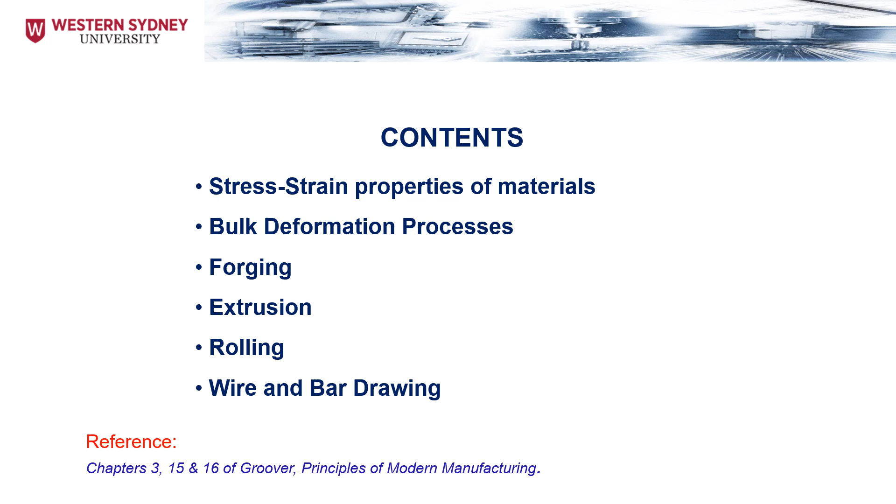First we need to know what are the mechanical properties in design and manufacturing. The mechanical properties will determine the material behavior when subjected to mechanical stresses. These properties include the elastic modulus, the ductility, the hardness, and other various measures of strength.

The mechanical properties important to the designer, such as high strength, would usually make manufacturing more difficult. Let me give you an example: you have a rod made of copper and another one with the same diameter made of steel.

If you try to bend the one made of copper, it's going to be much easier, using less force to bend, while it's going to be much harder if you do it with the same bar made of steel.

First we need to know what are the static stresses we have in general. We have the tensile stress, which tends to stretch the material. Remember the same bar as an example—try to pull it from both sides to make it longer, so it's going to be stretched. This is what we call the tensile stress.

Now the other type we have is compressive, and this one tends to squeeze it. So we're going to push the rod from both ends inward—this will be compressive.

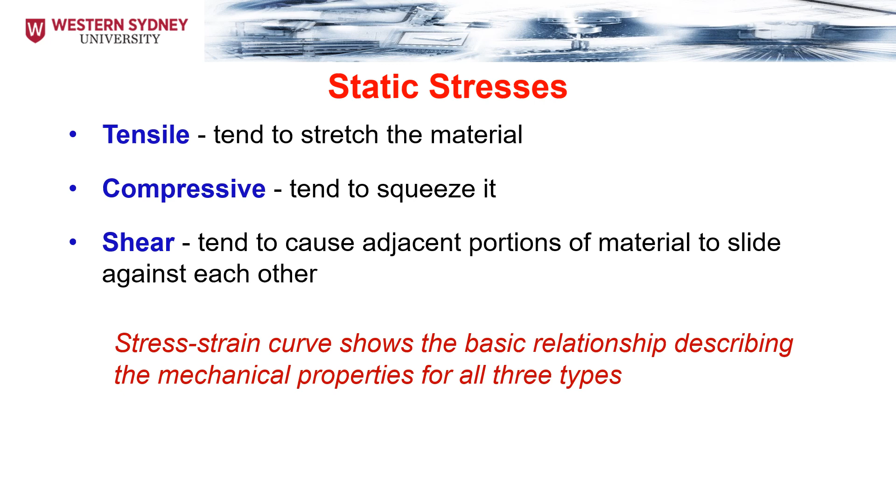The stress-strain curve will show the basic relationship describing the mechanical properties for all the types. So once again, here we have the tensile, we have the compression, and we have the shear.

One of the best ways to check the properties of materials is what we know as the tensile test. The tensile test is the most common test for studying the stress-strain relationship, especially in metals.

I say especially in metals because actually it can be done also with different materials. We can do it even for plastic, for example, and even ceramic to a certain level, but usually it can be done with any material that can be used for testing.

As we apply the force, the moving crosshead is going to move down, and this will cause the elongation of the specimen, so it's going to reach a new length.

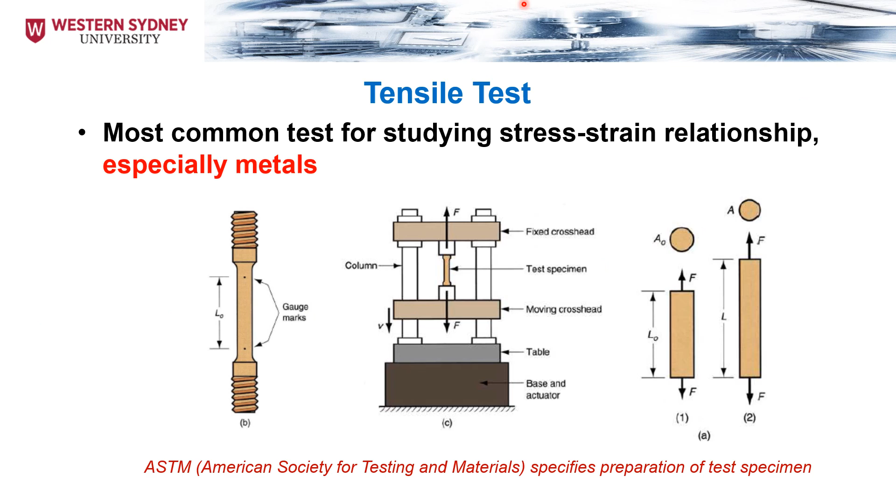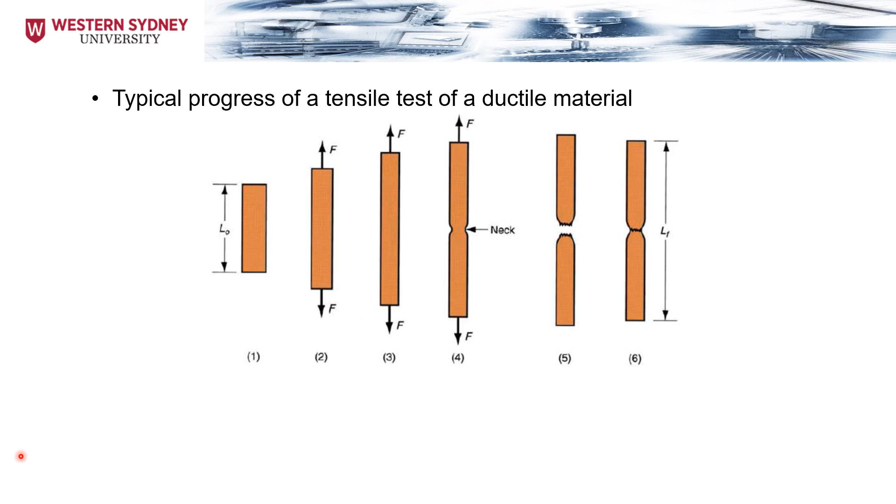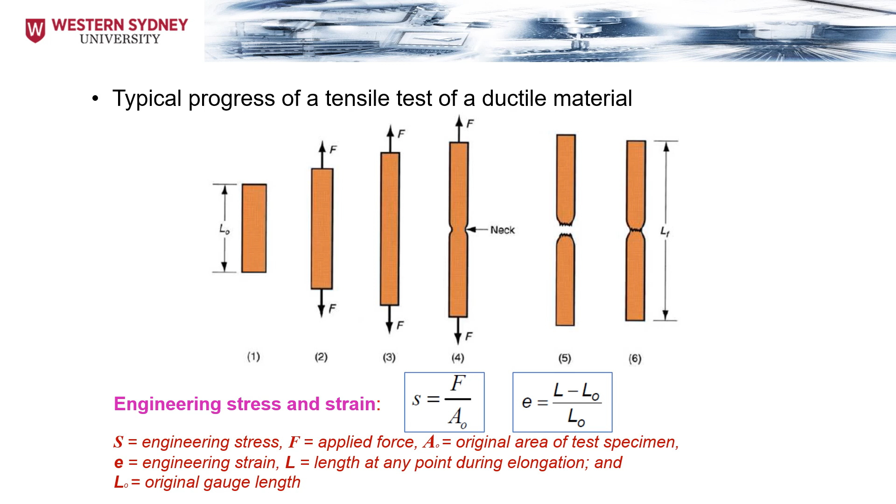So what's happening in the elastic region? This region occurs prior to the yielding of the material. Before yielding, we follow what we know as Hooke's law. During Hooke's law, the material shows elasticity, meaning any deformation is simply relieved as we remove the force. After we reach the yield strength, we enter the plastic region, and after yielding, any deformation becomes permanent.

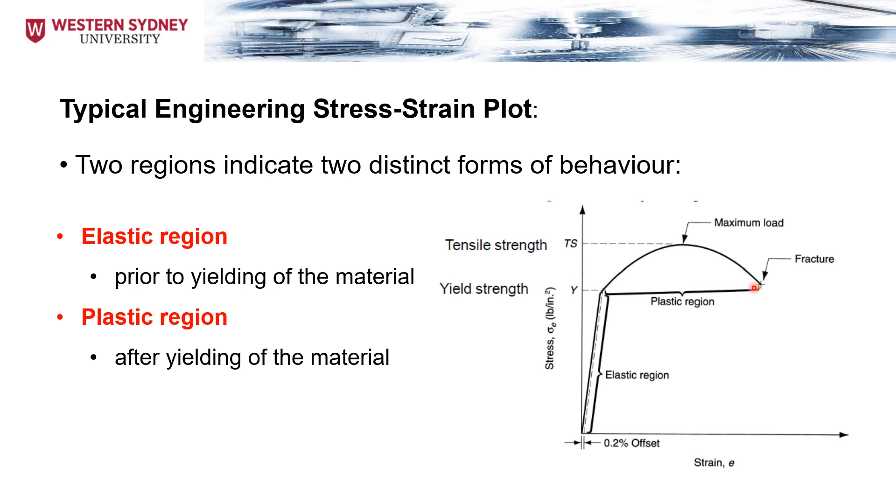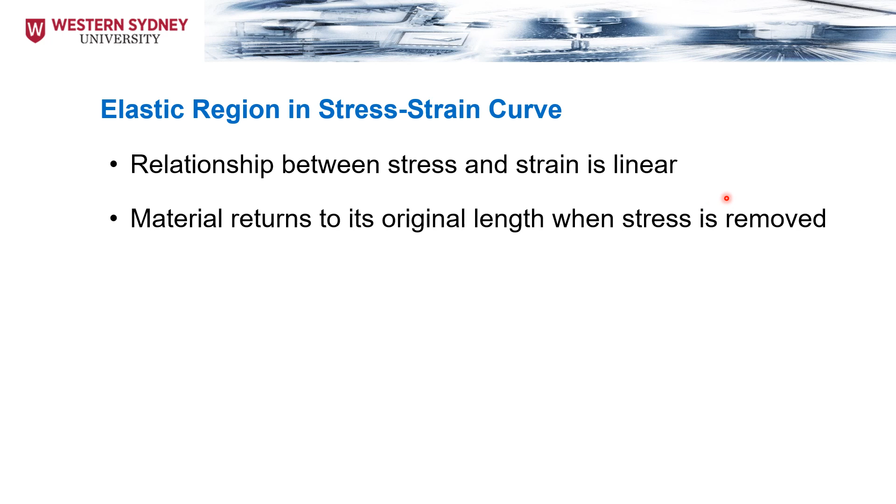Again, in the elastic region of the stress-strain curve, the relationship between stress and strain is linear, and the material returns to its original length when the stress is removed. This process follows Hooke's law: stress is equal to the modulus of elasticity, or Young's modulus, multiplied by the strain of the material.

E is a measure of the inherent stiffness of the material. Harder, stiffer materials have a higher value of E. Its value differs for different materials. For example, steel is higher than copper, and copper is higher than aluminum, and so on.

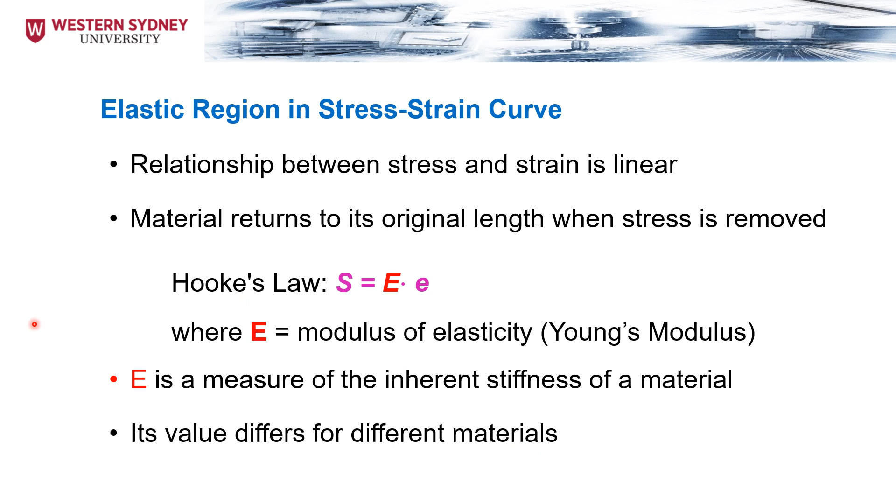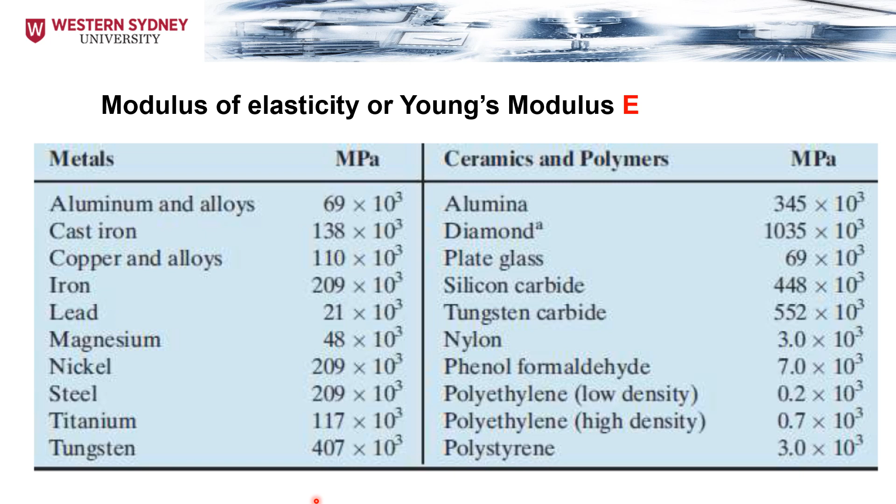The yield point in the stress strain curve is the turning point between the elastic region and the plastic region. As stress increases, a point in the linear relationship is finally reached when the material begins to yield.

The yield point Y, the stress at this value and that strain, can be identified by the change of slope at the upper end of the linear region. Y is a strength property, and other names for the yield point are yield strength, yield stress, and also the elastic limit.

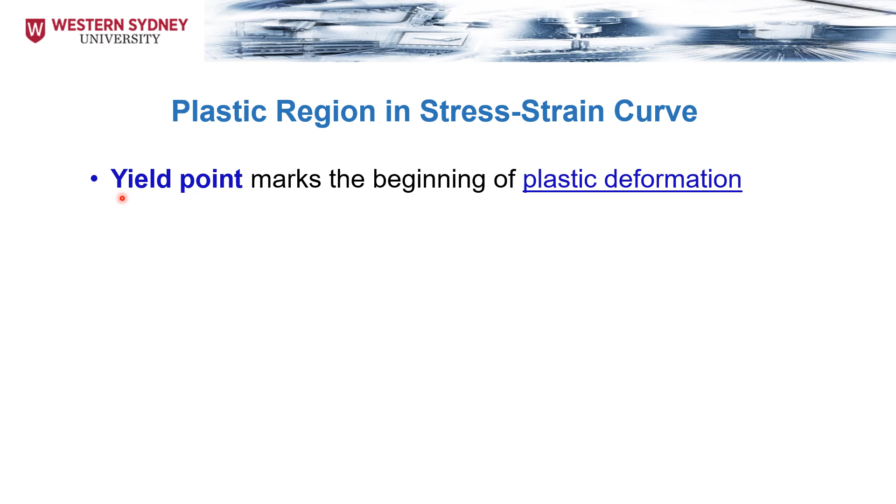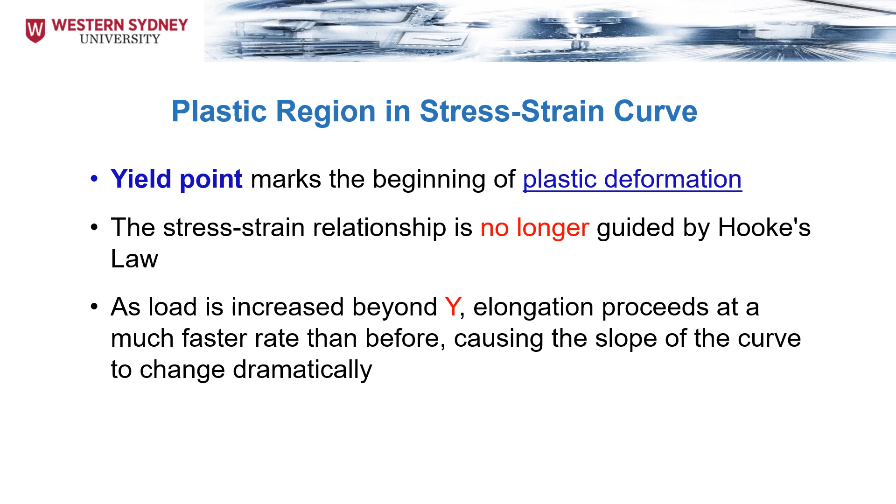After the yield point, the material starts to behave as a plastic material, so we enter the plastic region of the stress strain curve. The yield point marks the beginning of plastic deformation, and the stress strain relationship is no longer guided by Hooke's law. As the load increases beyond the Y value, the elongation proceeds at a much faster rate than before, causing the slope of the curve to change dramatically.

The tensile strength in the stress strain curve, known as the maximum load point, is where elongation is usually accompanied by a uniform reduction in the cross-sectional area, as mentioned earlier. This is consistent with maintaining a constant volume.

Remember that whenever the length changes, the volume remains the same, and this only happens if the cross-sectional area of the specimen drops.

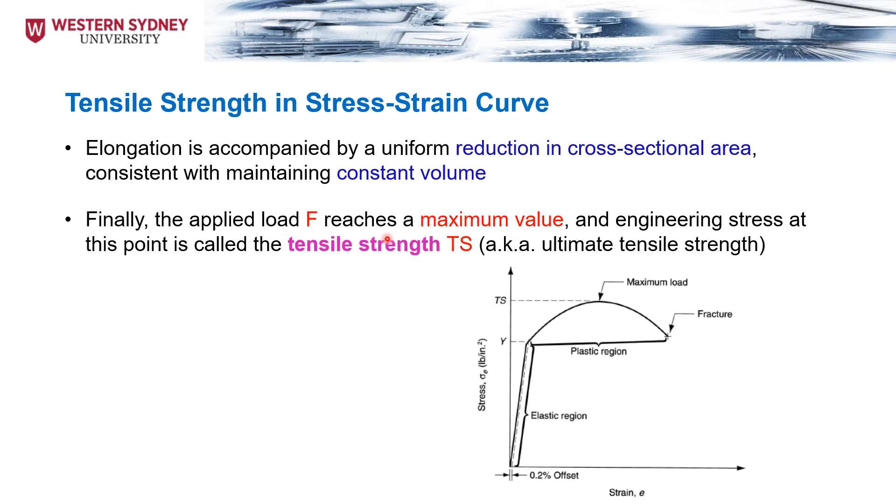So as we apply the load F, we reach the maximum value here, and the engineering stress at this point is called the tensile strength, or TS, also known as the ultimate tensile strength of the material. This can be given as the value of the maximum load, not the initial load, divided by the original cross-sectional area of the specimen.

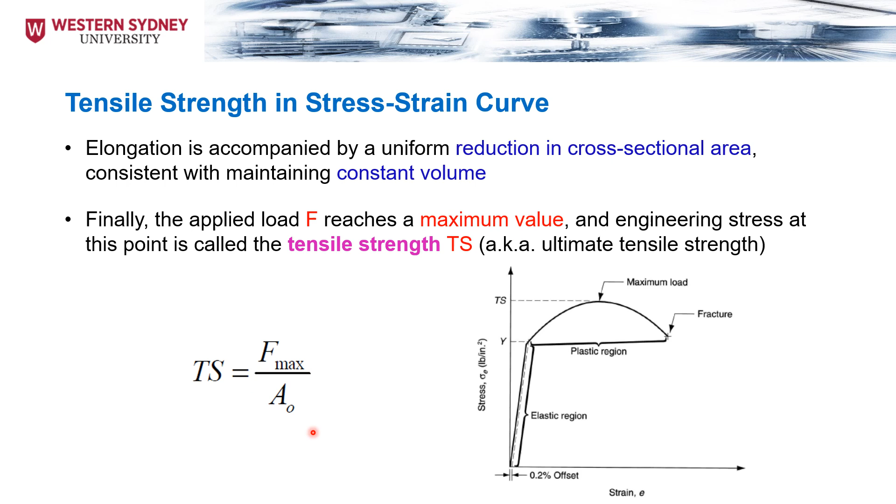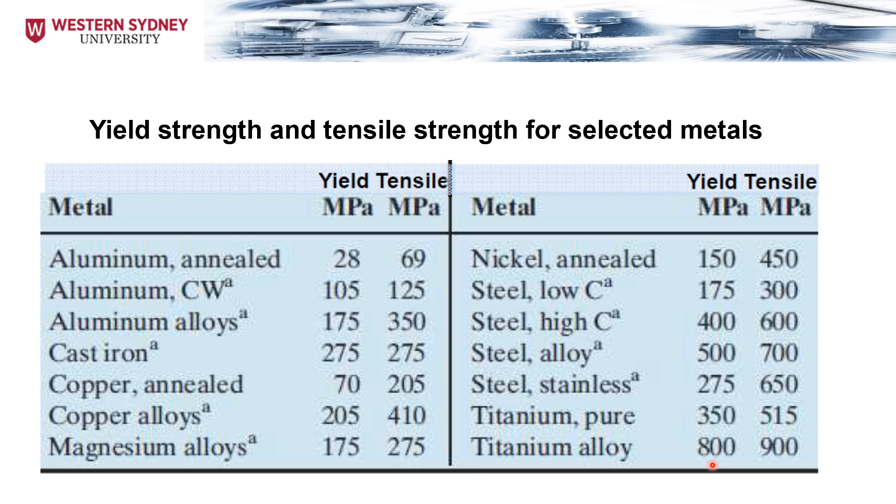The ductility of materials and how this changes will affect the tensile test operation. Ductility is the ability of materials to plastically strain without fracture.

Let's take an example with wood. If I have a piece of wood, a piece of aluminium, and a piece of steel, and I try to deform or bend the wooden one, it will break before it has any plastic deformation, unless you add some heat. That means wood is a non-ductile material.

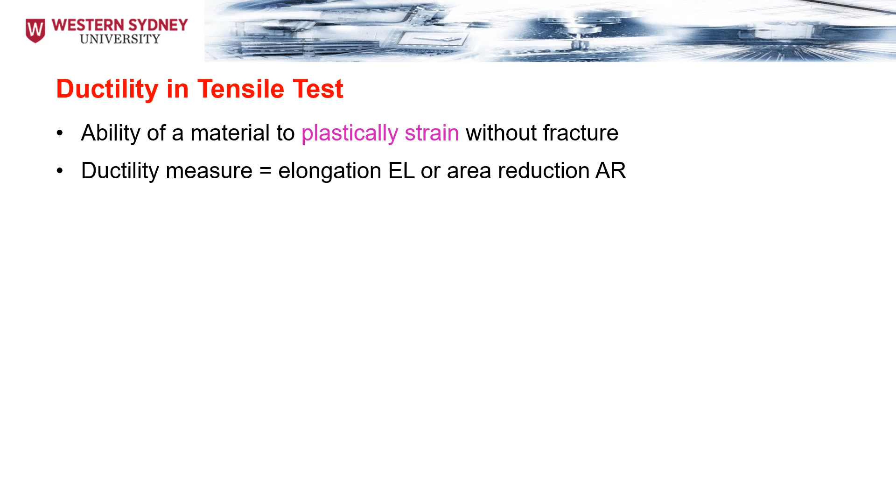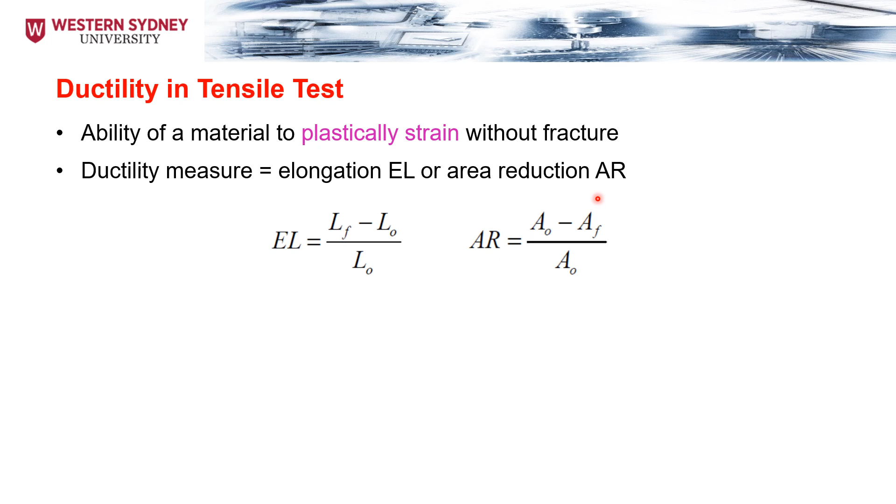Elongation is simply delta L divided by the original length, so the final length minus the original length divided by the original length. Or it's the original cross-sectional area minus the final cross-sectional area, divided by the original cross-sectional area.

EL is the elongation, LF is the specimen length at fracture, LO is the original specimen length, and LF is measured as the distance between the gauge marks after the two pieces of the specimen are put back together after the fracture.

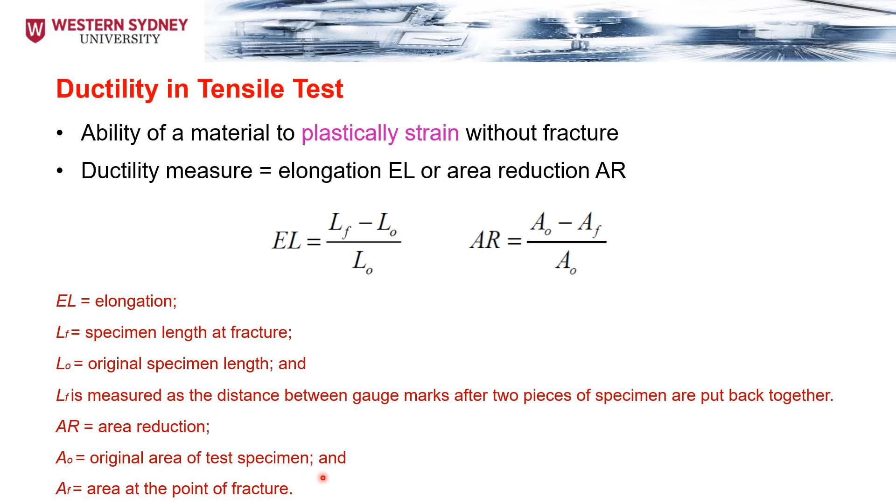AR is the area reduction, AO is the original area of the test specimen, and AF is the area at the point of fracture.

So the ductility as a percentage of elongation for the selected material is given in this table. You can see, for example, for aluminum, we're going to have 40%.

Now let's look at a non-ductile or less ductile material, the ceramic. It's 0%. For the polymers, the thermoplastic polymers have an elongation value of 100%. The thermosetting polymers, which are harder, have only 1%. And for the elastomers, it's also 1%.

So among these values, the elastomers and thermosetting polymers have less ductility. That means when you change their shape, they return back to the original shape because they don't have any plasticity. They don't undergo deformation when force is added.

For the other materials, you get a reasonable value. Steel 30%, steel alloy 20%, austenitic stainless steel 55%. For aluminum alloys with heat treatment, it's 8%. For annealed aluminum, it's 40%. For annealed copper, it's 45%.

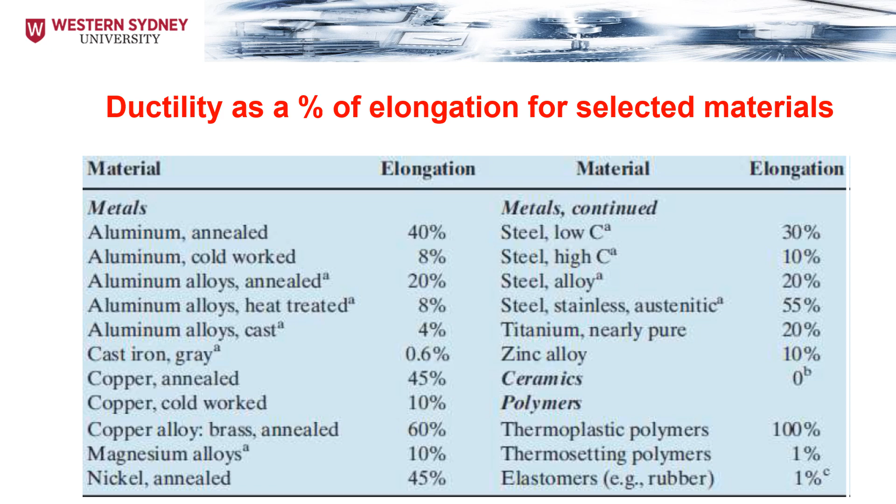Now, cast iron is not a ductile material. We cannot make a deformation for it because it's going to break. Actually, in cold work - and that's what we're going to explain later.

Now, we know the actual stress strain, but we also have true stress and true strain. The true stress is the value obtained by dividing the applied load by the instantaneous area instead of the original area. So true stress equals the instantaneous force divided by the actual or instantaneous area resisting the load.

True strain is a more realistic assessment of the instantaneous elongation per unit length. So true strain is the natural logarithm of the instantaneous length divided by the original length.

So if I redraw the stress strain curve versus the true stress strain curve, you'll see the difference between them: fracture happens after the fast degradation in the cross-sectional area, and this causes the stress to drop dramatically after the value of the TS.

In the case of the true strain diagram, you can see that things drop less dramatically, and the value doesn't have to be exactly like the yield point stress, as we can see in this diagram.

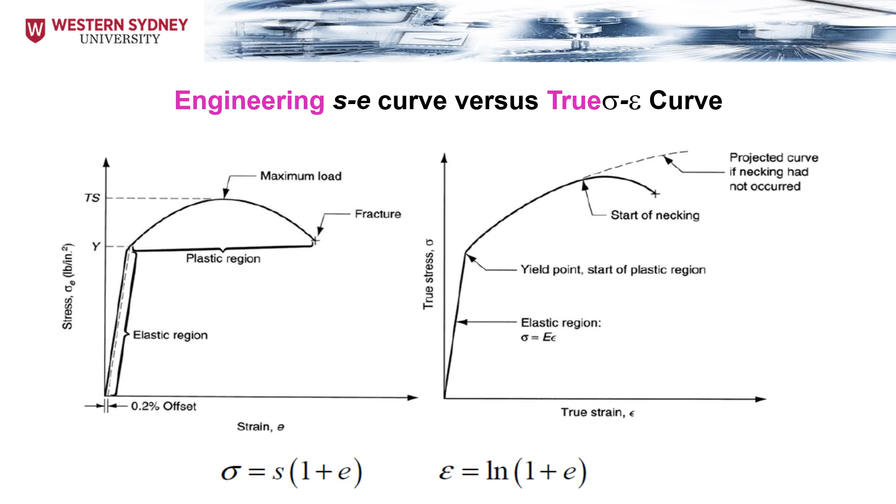So the strain hardening, or work hardening, in the stress strain curve - what we're going to have here, wait a second.

So we know that the true stress increases continuously in the plastic region until we reach necking. In the engineering stress strain curve, the significance of this was lost because the stress was based on an incorrect area value. It means that the metal is becoming stronger as strain increases.

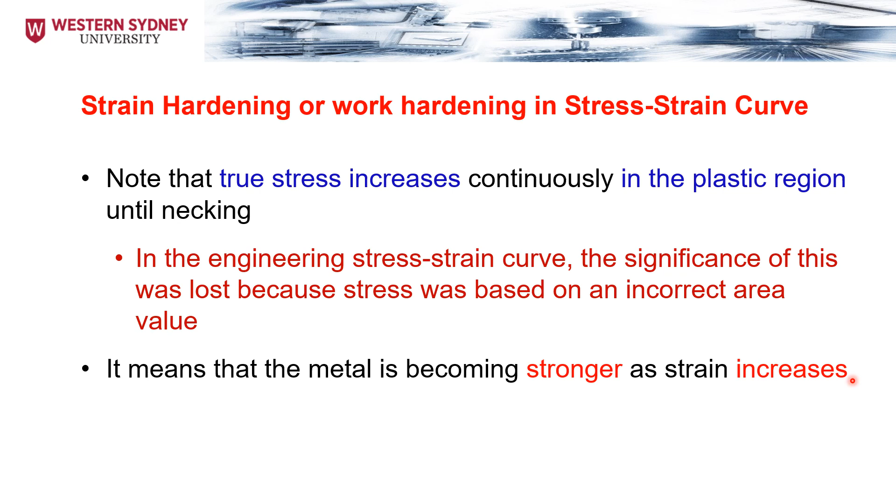So this gives a simple hint about strain hardening: the material becomes stronger as the strain increases. So if I roll or compress a material again, it becomes stronger because its length has changed. Because we added forces, we changed the metal's strain, and thus the material becomes stronger.

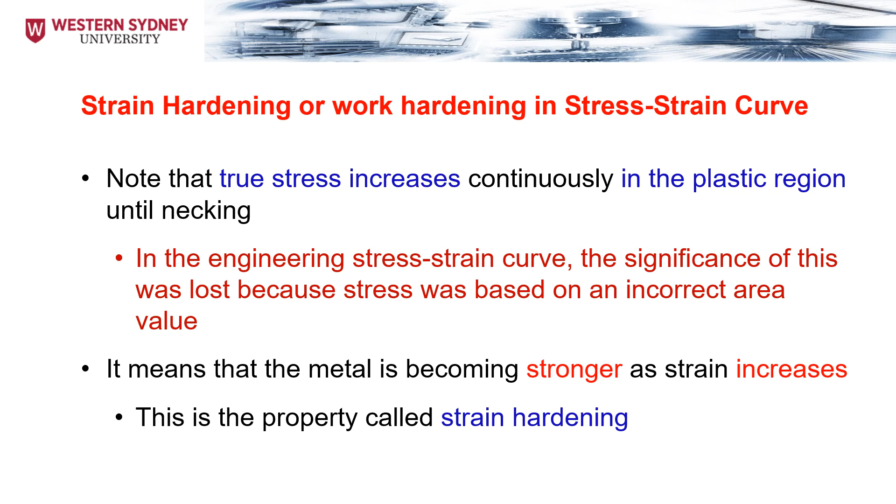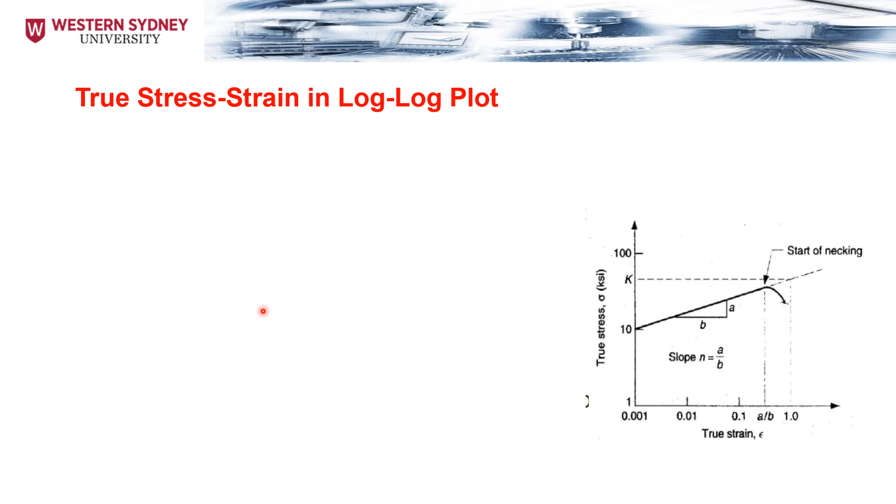So let's see how we use that. Because it's a straight line in the log-log plot, the relationship between true stress and true strain in the plastic region is called the flow curve. And S is going to be the YF, which is called the flow stress.

So the value of the stress we have here is the flow stress, which can be found from the following equation: flow stress equals K, the strength coefficient in megapascals, multiplied by the strain at any point raised to the power n, which is the strain hardening exponent - the slope of that straight line.

So the categories of the stress-strain relationship: first, we're going to consider that the material is perfectly elastic. Second, elastic and perfectly plastic, or elastic and strain hardening. Perfectly plastic means it's going to be straight force, this line going to be horizontal. Whenever we add the force, the material is simply deformed.

We have the elastic and then perfectly plastic. That's when the force is increased, the stress is increased until we reach the yield point, and then after that we have a horizontal line for the plasticity of the material. We also have the elastic and strain hardening, and that's what we have in most of the cases in forging processes.

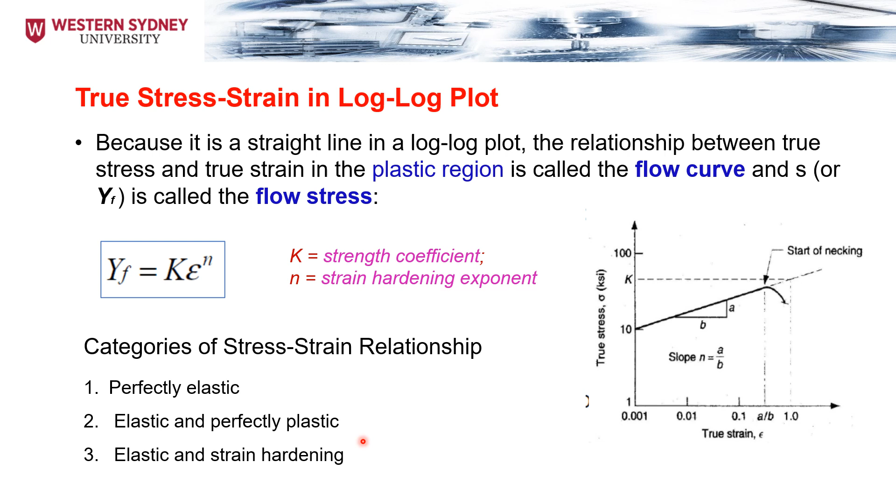So for perfectly elastic, whenever we have the stress, the strain will be changed linearly. In that case, we're not going to have any plastic deformation, and that's what we have in the case of brittle materials. So once again, we go back to the example of the wooden piece. When we try to bend it, it's going to increase the stress, but when you relieve the stress, the shape of the material will come back to the same position.

We have the second case, elastic and perfectly plastic. In that case, the K value is equal to the yield strength, and the slope of the line in the plastic region is 0. That means the value for the flow stress is equal to the K value directly. That's what happens with metal when it's heated to a high temperature—it gets softer, and thus the same force, the same pressure or strength, is applied to make the deformation.

We also have the elastic and strain hardening case, where the K value is more than the yield strength value, and the N value is not equal to 0. So we have an actual slope for this curve, and that's what happens in most ductile materials when they're cold worked. Every time we compress or stretch the material, the K value is higher than the yield strength—we need more stress to make the change in the shape of the metal.

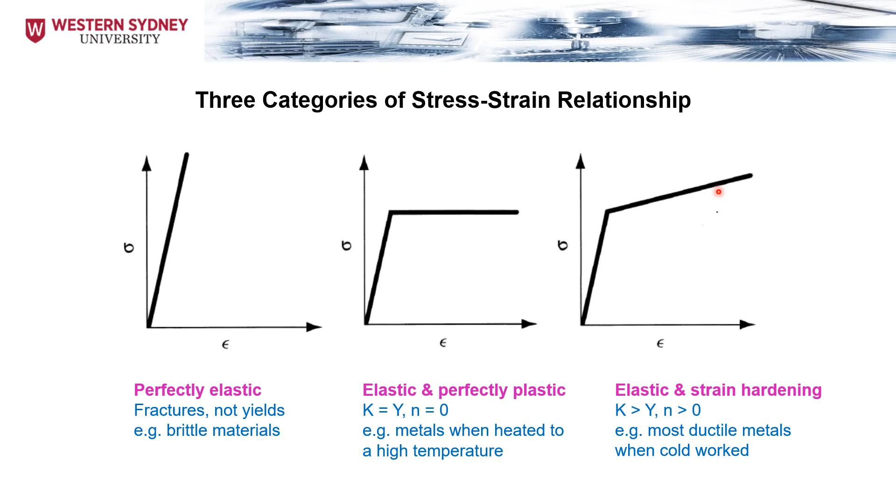We put the specimen in between and squeeze it. In that case, the length is going to be dropped, or what we call the height—the height is going to be dropped. So once again, the volume is constant. That means every time we drop the length, the diameter or cross-sectional area is going to be increased, because the volume once again is constant.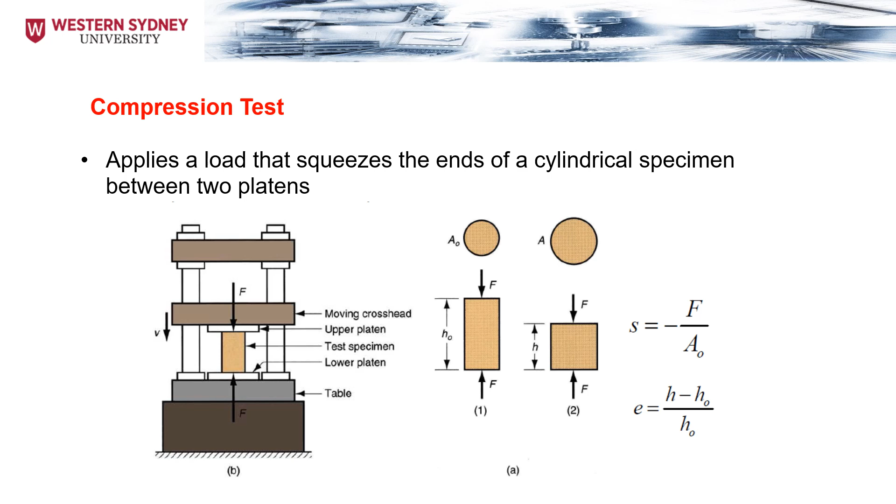In that case, the stress value is going to be equal to F over A, but negative because we are compressing, not stretching. The strain is going to be equal to H minus H0 divided by H0. As long as H is less than H0, we'll get this value as negative, but we always take it as an absolute or positive value for the convenience of calculations. Now for the stress-strain curve in the compression case, instead of reaching a TS value...

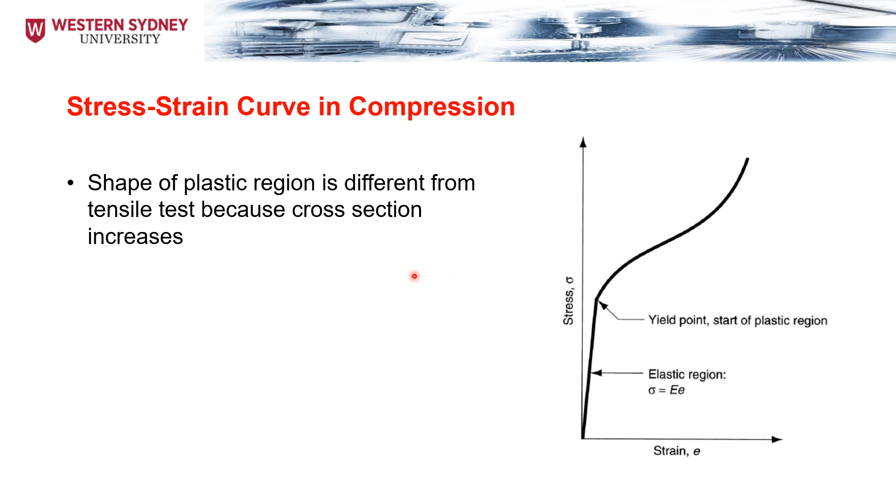We're going to have the sudden, dramatic drop in the cross-sectional area, and then we get the fracture. The stress is going to keep increasing because logically the material is not going to be broken. It's always going to be compressed, but it's not going to be bent between the two parts of the machine. So the shape of the plastic region is going to be different from the tensile test because of the cross-section. It simply keeps increasing to infinity, so the calculated value of the engineering stress is always going to be high.

Now, the tensile test versus the compression test - what will be the difference between them? Although differences will exist between the engineering stress-strain curves in tension and compression tests, the true stress-strain relationships are going to be nearly identical. Since tensile test results are more common, the flow curve values for K and n from the tensile test data can be applied to a compression test.

When using the tensile K and n value data for compression, we need to ignore necking, which is a phenomenon peculiar to straining induced by tensile stresses.

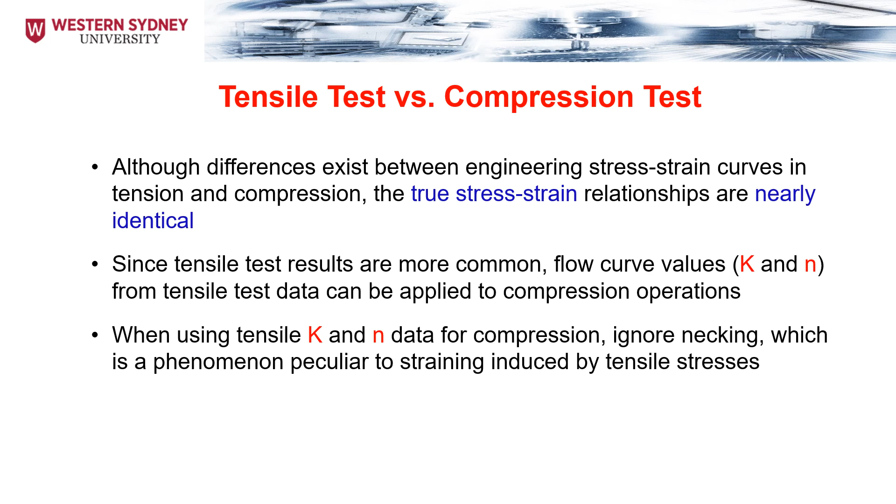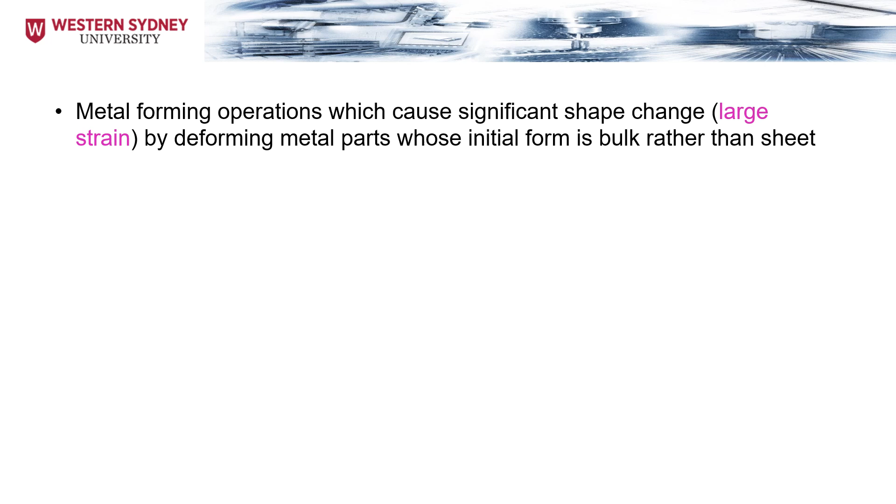Now, all these properties are going to be applied in what we know as the bulk deformation processes. Here we are going to cover the most common deformation processes. Metal forming operations, which cause significant shape changes, cause large strain by deforming metal parts whose initial form is bulk rather than sheet. So bulk deformation deals with bulk materials rather than sheet. If we work with sheet, we call it sheet metal working. These processes stress the metal sufficiently to cause plastic flow into the desired shape.

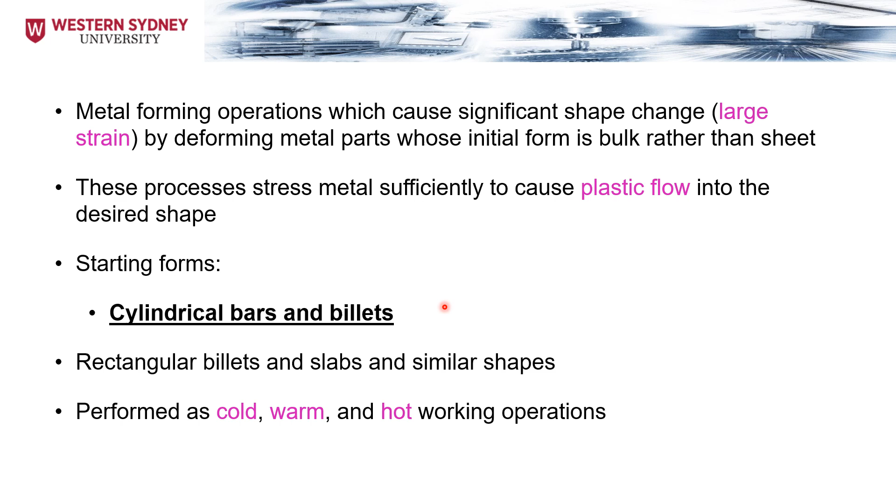The starting forms are usually cylindrical bars and billets, rectangular billets and slabs, and similar shapes. It can be performed as cold, warm, and hot working operations.

Now, when we say that an operation is cold formed or hot formed, it depends on the temperature we use. Cold forming is when the deformation process happens when the temperature of the specimen, bar, or bulk material is less than 0.3 of the melting point. So if it's done at room temperature of 25 degrees, or even at 100 degrees, it's considered cold forming.

In that case, we're going to have better accuracy control because there will be no expansion or contraction in the volume. We're going to have better surface finishing because there will be no oxidization of the metal due to high temperature. It's going to cause strain hardening - we said that strain hardening is how to get stronger materials because you change the strain of the material. Large forces are going to be required, and this will be a negative point. Clean surfaces, which is good, because once again we're not going to have any changes in the metallurgical properties of the materials.

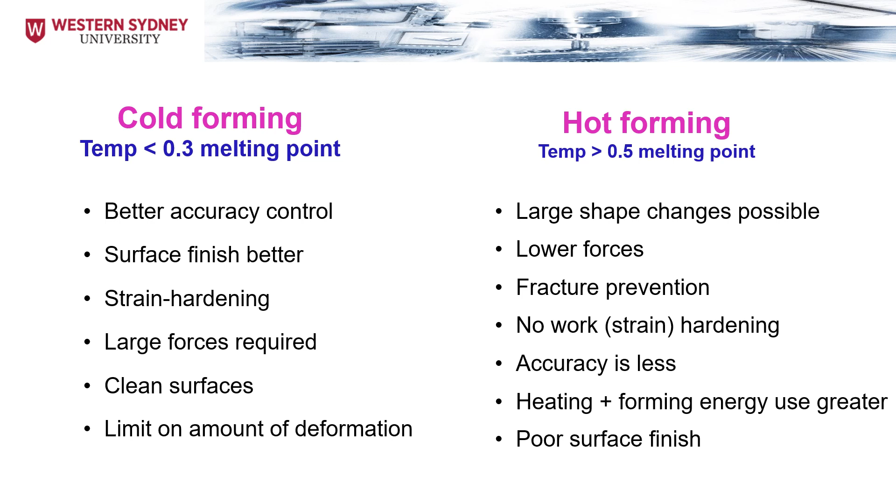This gives you a hint why the blacksmith always heats up the metal before doing work on it, because he's simply increasing the ductility of the material. The metal at lower temperature will require higher strength to cause the deformation. When it gets heated up, it's going to get smoother.

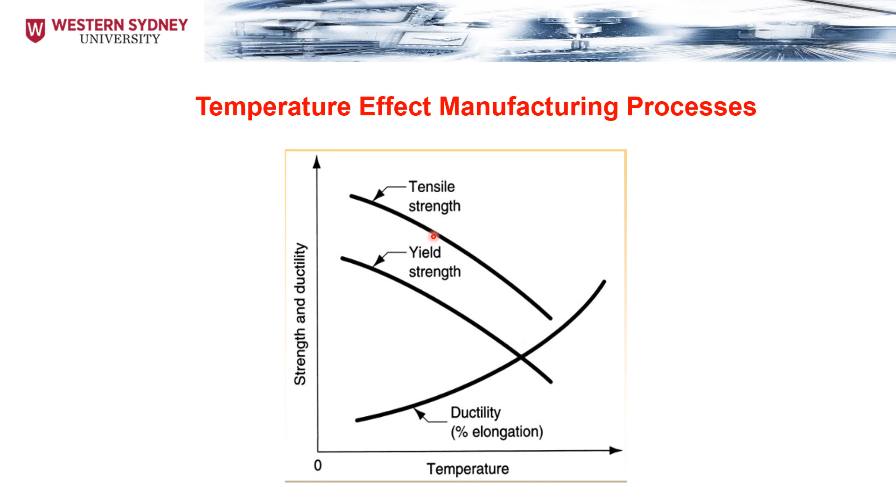The four basic bulk deformation processes are: forging, where the work is squeezed and shaped between opposing dies; extrusion, where the work is squeezed through a die opening and thereby takes the shape of that opening; rolling, where the slab or plate is squeezed between opposing rolls; and finally wire and bar drawing, where the diameter of the wire or bar is reduced by pulling it through a die opening.

For extrusion, if I put some paste inside this syringe and squeeze it by moving the piston inside, the material is forced to leave through the syringe outlet, which has a cylindrical shape, and thus I make a cylindrical shape. That's what they actually use for decorating cakes - you put the cream in the applicator and squeeze it, forcing it through the die, and it takes the shape of the die. But in our case, this is done with metal.

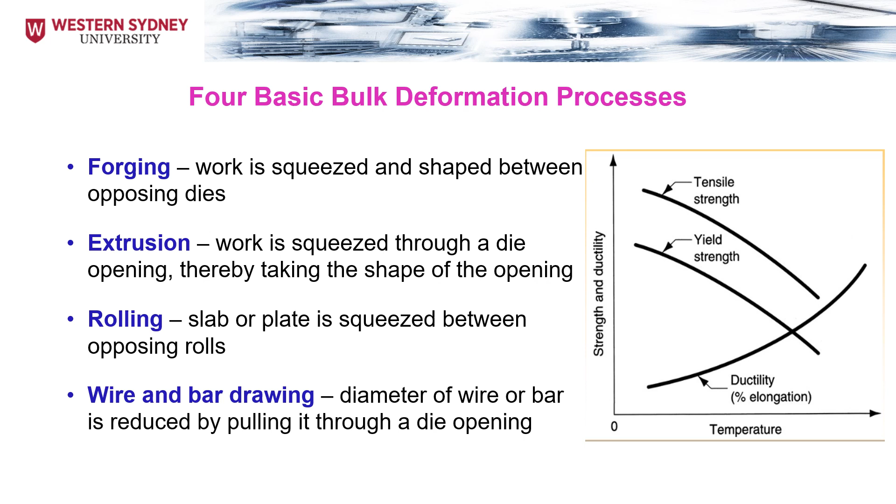So we're going to start with the first and oldest method among all, which is the forging operation.

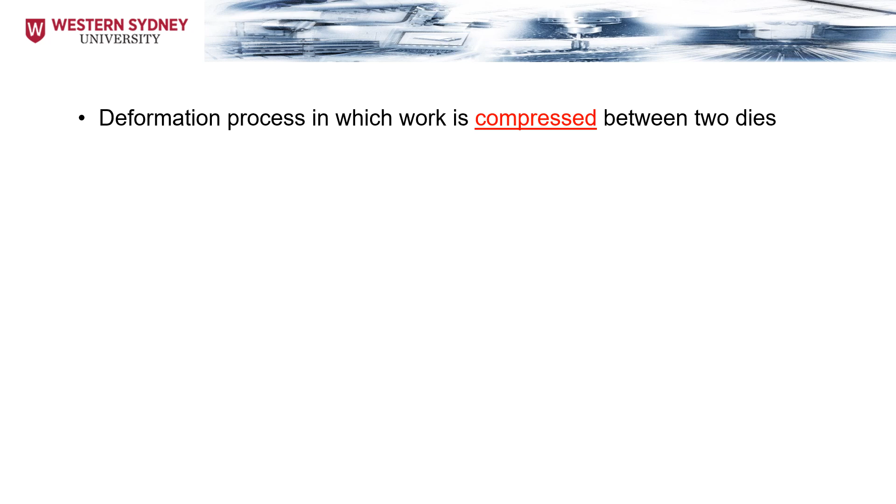In the forging operation, it's a deformation process in which the work is compressed between two dies. It's one of the oldest metal forming operations, dating back to about 5000 BC.

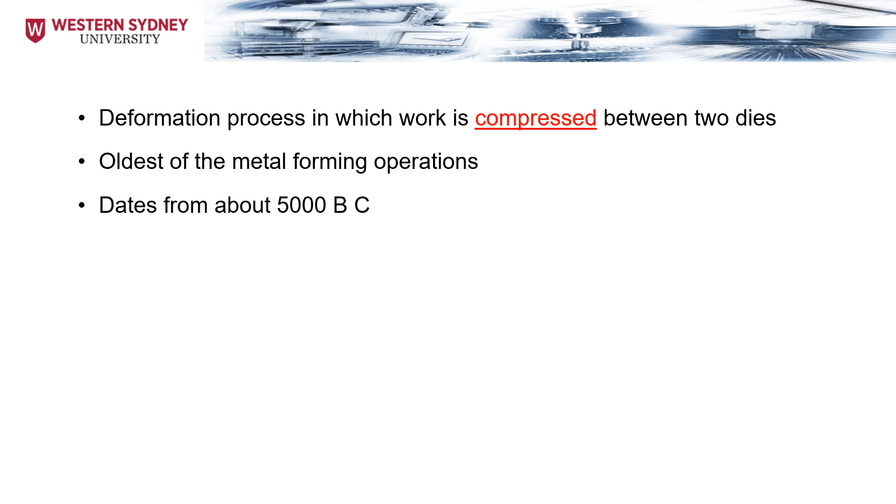Among the different products are engine crankshafts, connecting rods, gears, aircraft structural components, jet engine and turbine parts. Also, basic metals industries use forging to establish the basic shapes of large parts that are subsequently machined to final geometry and sizes.

By following this link, you can see some examples of the forging processes.

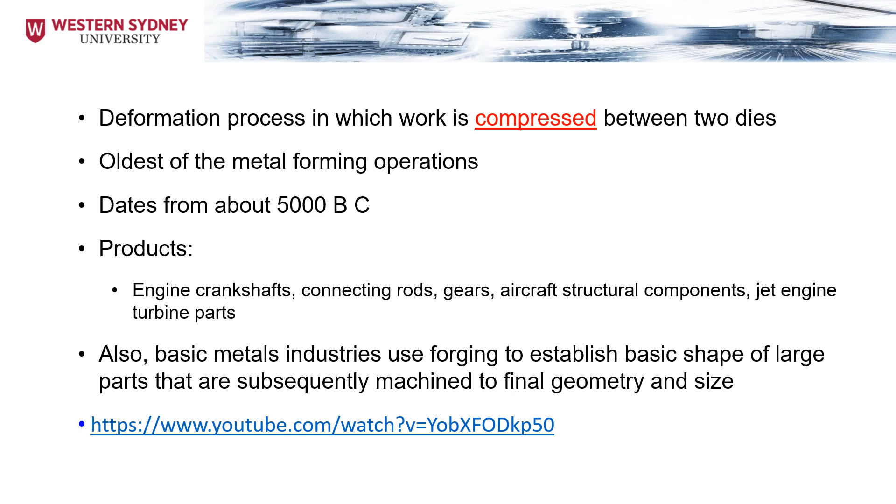The classifications of the engineering forging operations.

So we have the cold versus the hot forging. With hot or warm forging, the advantage is the reduction in strength and increase in ductility of the work metal, as we mentioned earlier. As you increase the temperature, the strength drops while ductility increases. In cold forging, the advantage is increased strength due to strain hardening, which doesn't happen in hot or warm forging.

Now, of course, hot forging is when the temperature of the metal is above 50% of the melting temperature, and cold forging is when the temperature is less than 30% of the melting temperature.

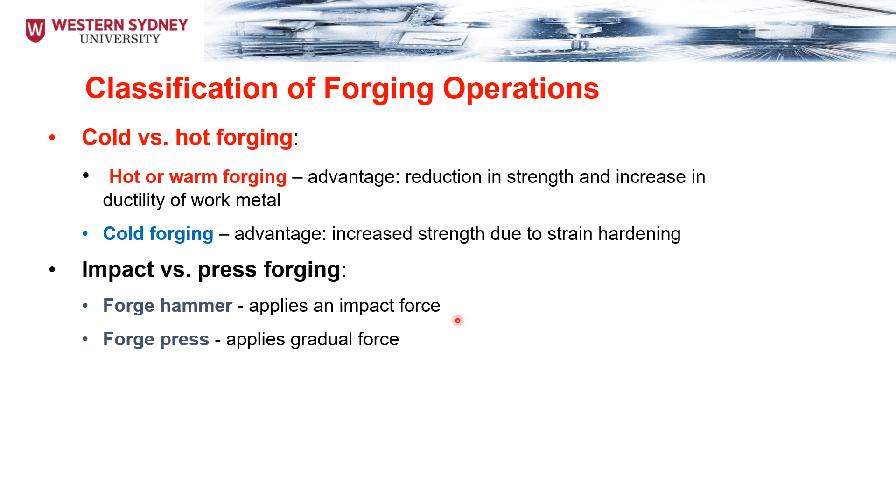Now, the other classification of forging operations is impact versus press forging. In impact forging, the forge hammer applies an impact force, so we keep hitting - the die leaves the part and comes to hit it with the impact force. The other term is forge press, where it applies a gradual force on the part to make the deformation.

The different types of forging operations are open die, where you can see we have two dies open, and the part is included with them. We have impression die forging, where we have two dies, but this die has cavities. This one also has something called the flash, which I'll talk about soon.

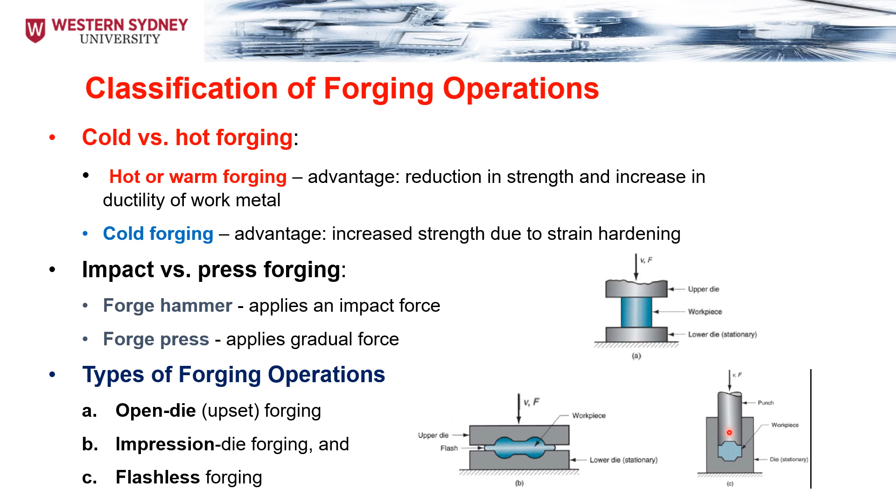We also have flashless forging, where once again the specimen is contained within the mold, and thus we compress it and force it to take the shape of the cavity of that mold.

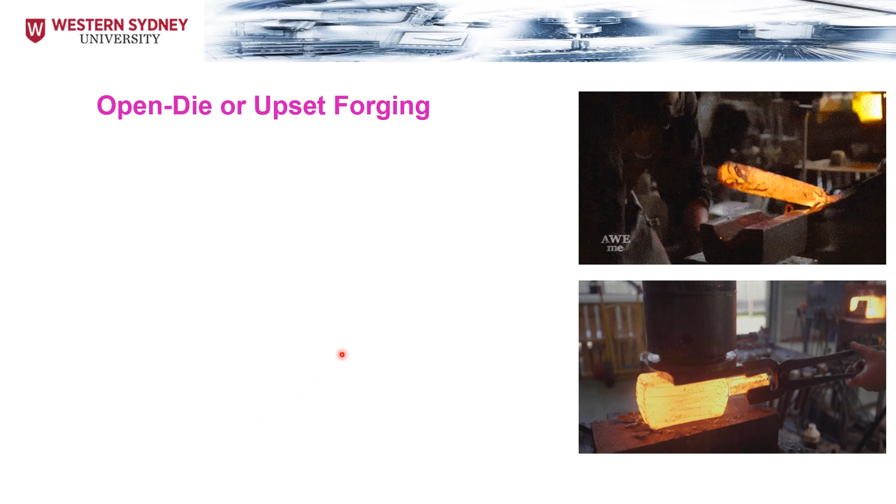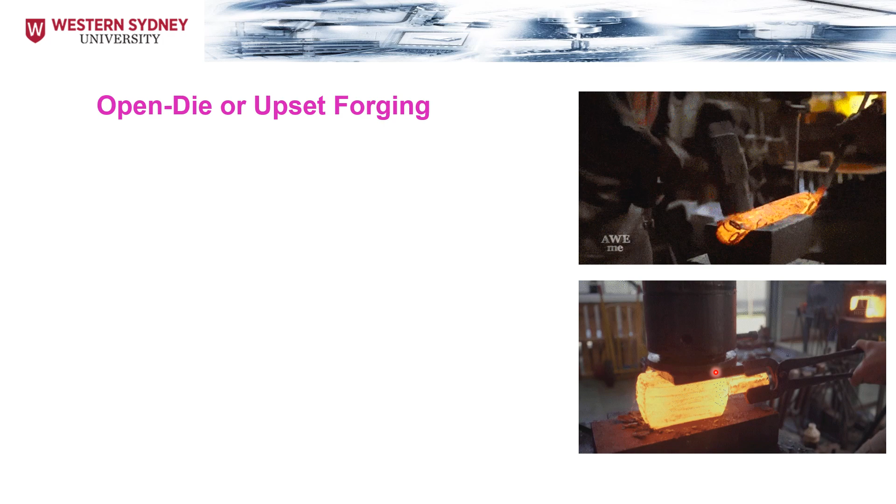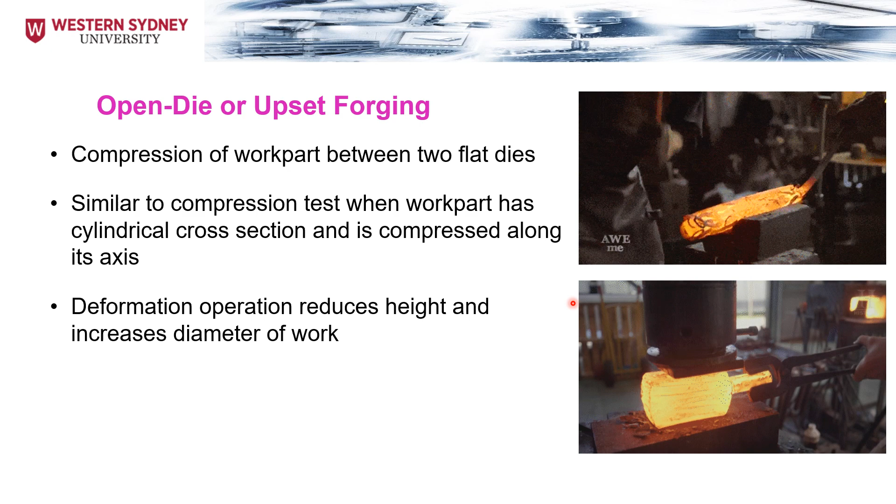So in this example, you can see that in open die or upset forging, we have the specimen placed between the two dies, and we start to have impact on it. Once again, this one is adding the impact - we have another type which can have gradual forces on it. So it's a compression of the work part between two flat dies, similar to the compression test, when the work part has a cylindrical cross section and is compressed along its axis. Deformation will reduce the height and increase the diameter of the work. Common names include upsetting or upset forging operation.

So if I analyze open die forging in the case of no friction - if no friction occurs between the work and the die surface, then homogeneous deformation occurs, so that radial flow is uniform through the work part height, and the true strain is given by the equation: true strain equals the natural logarithm of the original height of the part divided by the instantaneous height of the part. With this equation, we can get the initial strain, the mid strain, and the final strain. The flow stress value can be calculated by multiplying the K value.

As you remember, we have a specific K value for different materials, multiplied by the true strain raised to the power n.

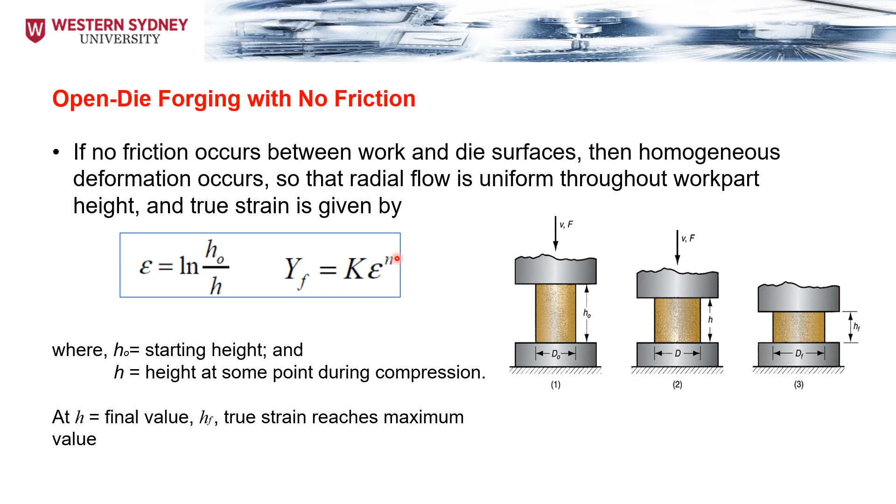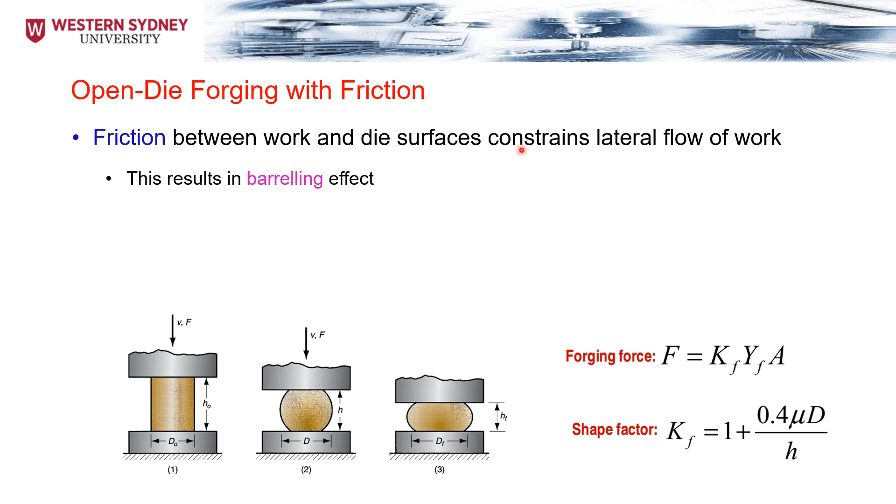Now, in real life, we're going to have friction between the specimen and the die at this point. This will cause the metal to not perfectly slide with the die, even if we add some lubricant. So this causes something called barreling. The barreling happens because the material sticks to the die. So in open die forging, friction between the work and die surfaces constrains lateral flow of the work, resulting in the barreling effect.

In hot open die forging, the effect is even worse due to heat transfer at the die surfaces, which causes the metal to cool and increase its resistance to deformation.

The forging force is calculated by the following equation: Kf multiplied by the flow stress multiplied by the area. The flow stress has been calculated from the previous equation, which is equal to K multiplied by the strain to the power n, and the area is the instantaneous area.

The Kf, or shape factor, is calculated with the following equation: Kf equals 1 plus 0.4 multiplied by the coefficient of friction mu, multiplied by the instantaneous diameter, divided by the instantaneous height. That means the Kf value is going to be different from case number 1 to case number 2 to case number 3, so we need to calculate a different value for the Kf each time.

Thus, the force in case number 1 is going to be less than case number 2, and less than case number 3, because each time we're going to have strain hardening for the part, and this will resist the material deformation, causing the force required to cause deformation to increase.

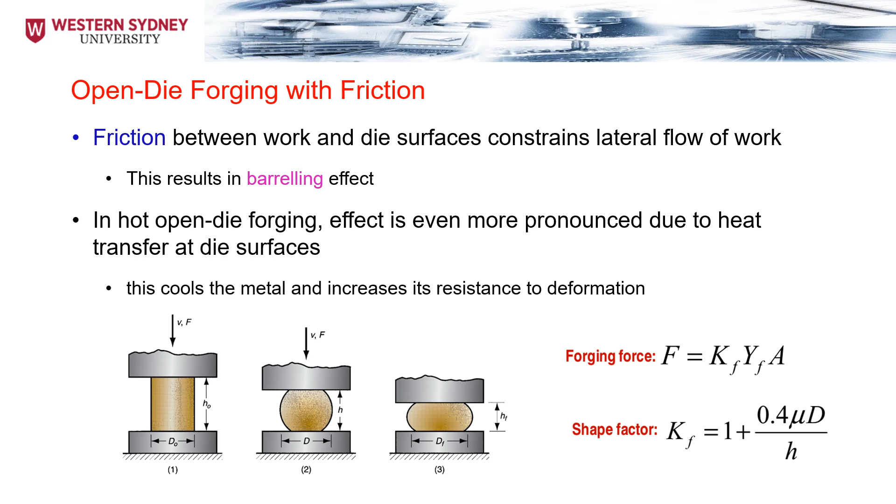Now we're going to have the first example for the... wait a second, did I miss something? Anyway, so this will be our first example on the open die forging.

In this example, we have a cylindrical workpiece subjected to a cold upset forging operation. The starting piece is 75 millimeters in height - this is the original height, HO - and 50 millimeters in diameter, that's the DO. It is reduced in an operation to a height of 36 millimeters, so we take it down from 75 to 36.

The HO and the H final. The work material has a flow curve defined by K equal to 350 megapascals and n of 0.17.

If we assume the coefficient of friction is equal to 0.1, we need to find the following: first, determine the forces as the process just begins, at the intermediate height of 62 millimeters, at the height of 49 millimeters, and the final height of 36 millimeters.

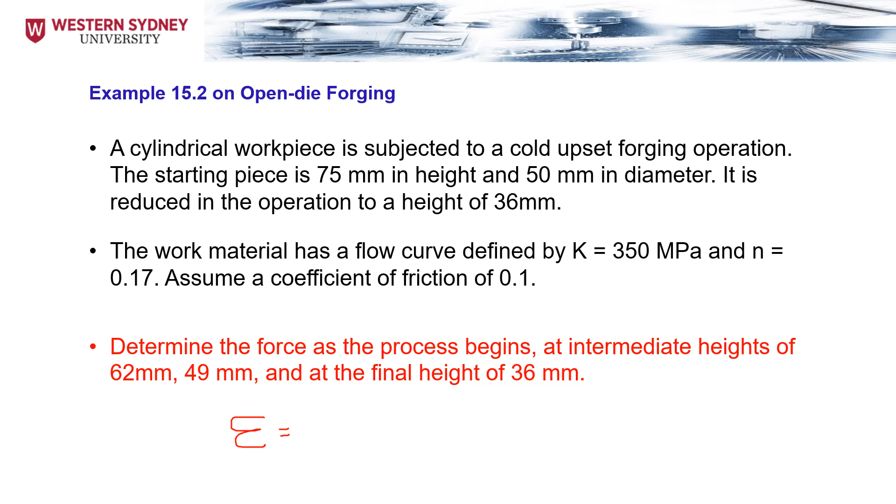We need to calculate the strain, which is the log of HO over the instantaneous H. The YF is going to be equal to K multiplied by the strain to the power n.

Finally, we can find the value for the force, which is equal to KF multiplied by YF multiplied by the instantaneous area. So that's what we need to find: a value for strain, a value for YF, a value for KF, and a value for the forces.

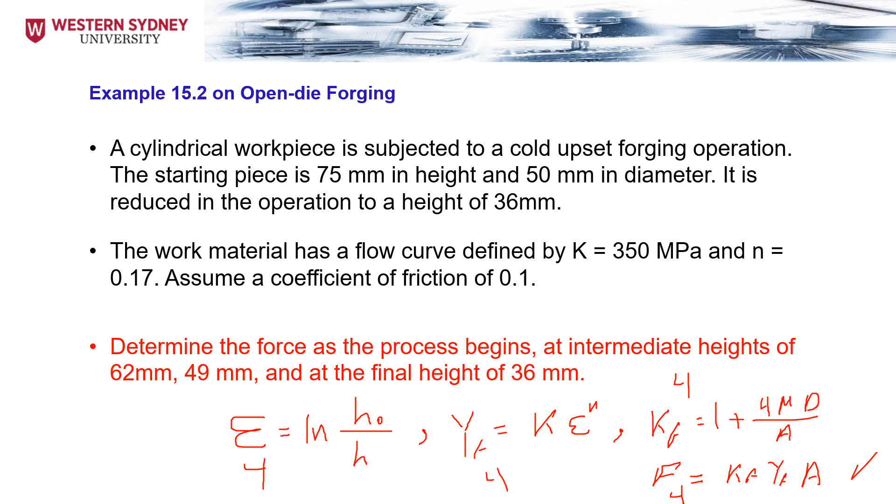So let's go through the solution of this example, and just remember you are going to have a similar question in your assignment, and we're going to have a similar question in the final exam. So let's go for the solution.

First, as the process begins, the work volume is going to be equal to the volume of the cylinder. So it's equal to 75 multiplied by pi multiplied by the diameter squared divided by 4. 75 is the original height, and the diameter squared divided by 4 multiplied by pi is the cross-sectional area.

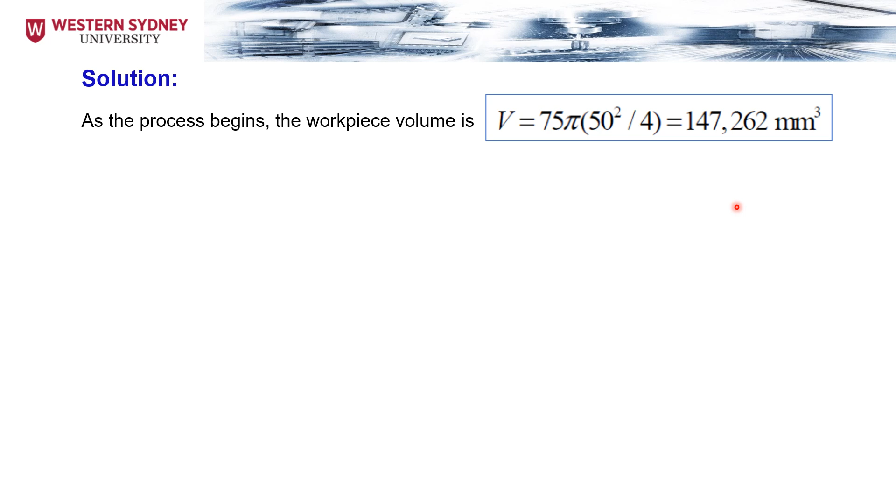So the volume is going to be 147,262 cubic millimeters. Just remember that this volume is always going to remain constant.

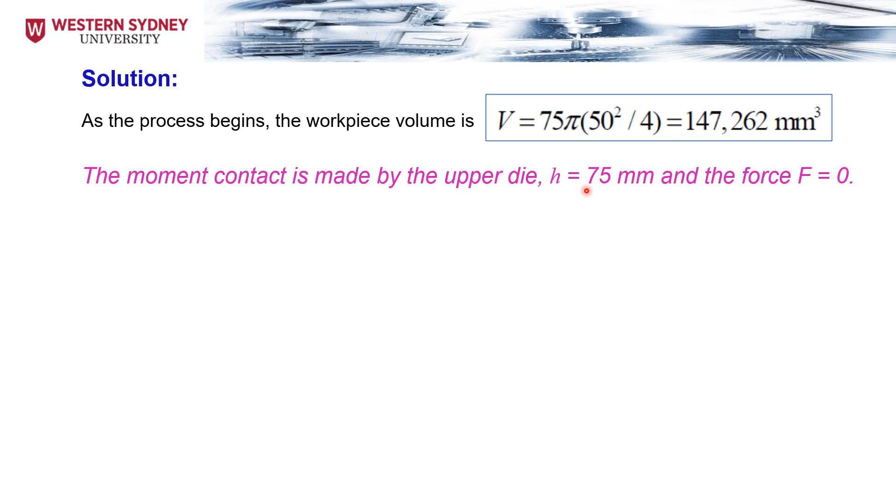At the moment contact is made between the upper die, H is going to be 75 millimeters and the force is equal to 0. At the start of yielding, H is going to be slightly less than 75 millimeters, and we can assume that the strain is equal to 2 in 1000.

Then the flow stress is calculated as follows. For the flow stress YF, the K is given, the N is given, and the strain is assumed to be 2 in 1000. So we substitute the values: 0.002 to the power 0.17 multiplied by K, that is 0.002 to the power N, multiplied by the value of K. The answer is 121.7 megapascal.

Now, the next step, we need to find the value for the diameter. The diameter originally was equal to 50 millimeters, and thus the area is equal to pi multiplied by the diameter squared divided by 4, and the area is 1963.5 millimeters squared.

So we can calculate the value for KF. The value of KF is equal to 1 plus 0.4 multiplied by mu multiplied by the diameter divided by H. The value for D is the same, the value for H is the same, 75, and the value of mu is given as 0.1, so we put all the parameters in and we get the value of KF equal to 1.027.

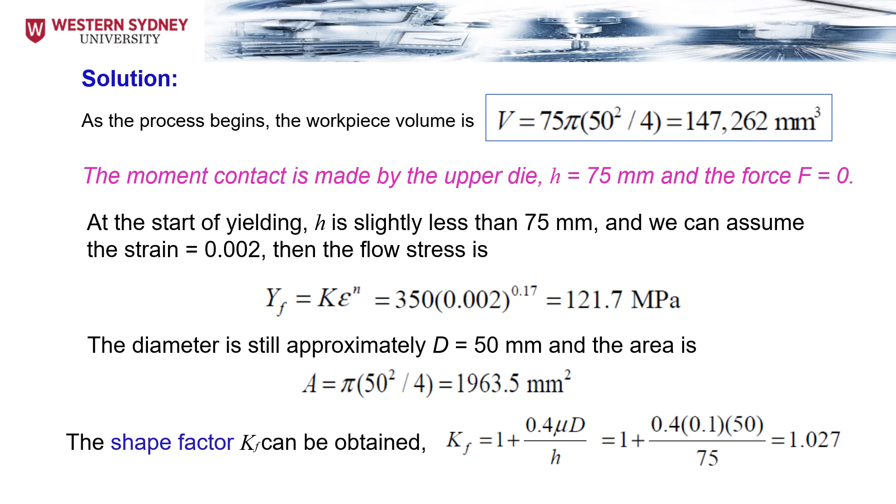Now we go to the next step. We have the value for YF, we know the value for KF, we know the area, and we can calculate the force. F is equal to KF multiplied by YF multiplied by A. Substituting the values, we find the force equal to 245,410 newtons.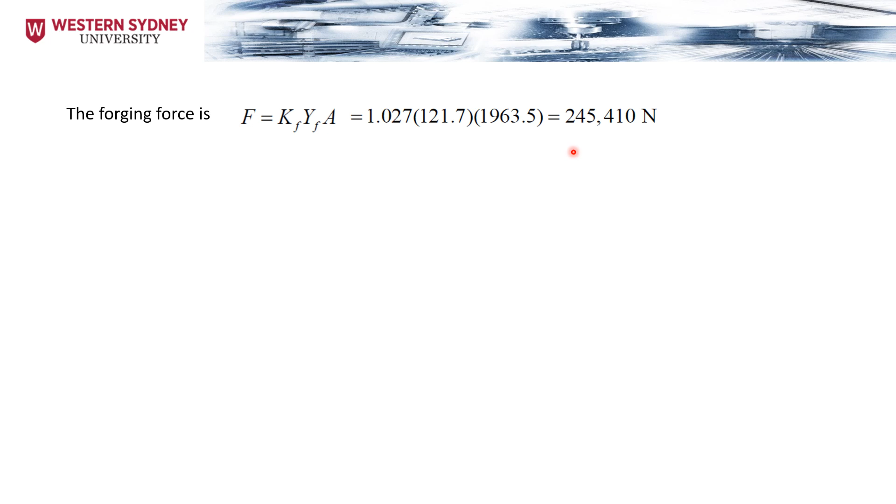Now the height is going to be dropped to 62 millimeters, so we need to calculate the new value for the strain. It's going to be the original height, which is 75, divided by 62, and we get that the new strain is equal to 0.1904.

Next, we need to use this strain to calculate the value of the flow stress YF. So we have 350, we have 0.1904 up to 0.17, and the new flow stress is equal to 264 megapascal.

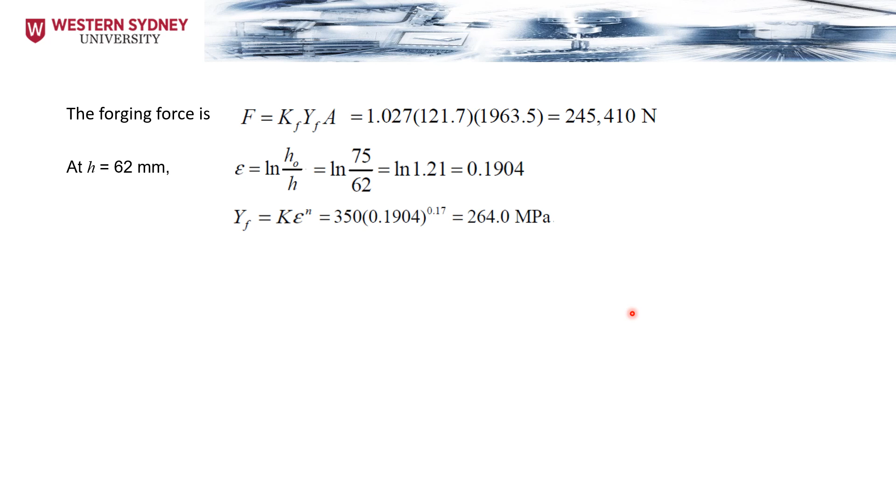Now we need to calculate the new diameter. Remember that the volume is constant, and we have a new height. So we can find the new area, which is equal to the original volume divided by the new height, and this will be equal to 2,375.2 millimeters squared.

If I know the area, I can find the diameter using this equation: the diameter is equal to the square root of 4 multiplied by the area divided by pi. So we substitute the area into this equation and find the diameter. You can see that the diameter has increased from 50 millimeters originally to 55 millimeters.

Now for KF, we substitute the new diameter and the new height, and we find the value for KF. The new KF is equal to 1.035. Now I substitute KF, YF, and the new area to find the value for the force, and you can see that the force has been almost multiplied by 2.5 to cause the deformation.

Now what happened is that the material got harder, because we have what we call strain hardening of the material when we change its strain.

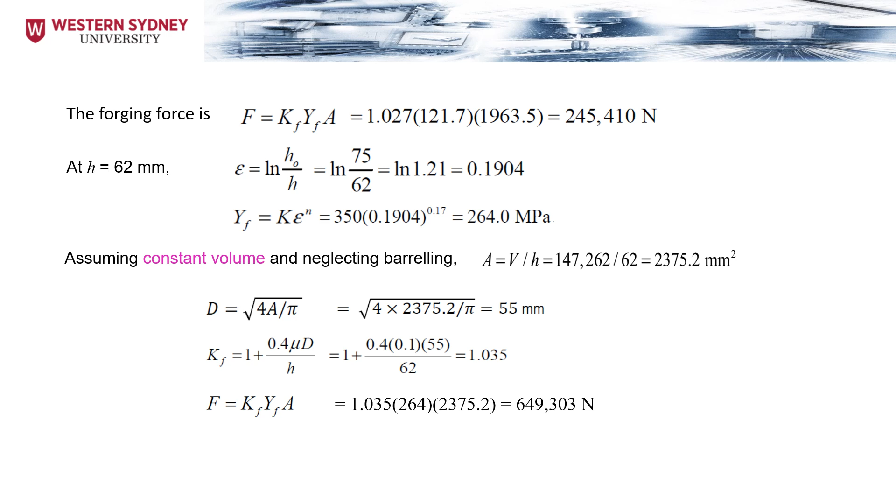Now we continue doing the same steps for the new two heights. At a height of 49 millimeters, the force is found to be 955,642 newtons. At a height of 36 millimeters, the force is 1,467,422 newtons. So we keep compressing, and what's happening is that the height keeps dropping and the force required keeps increasing.

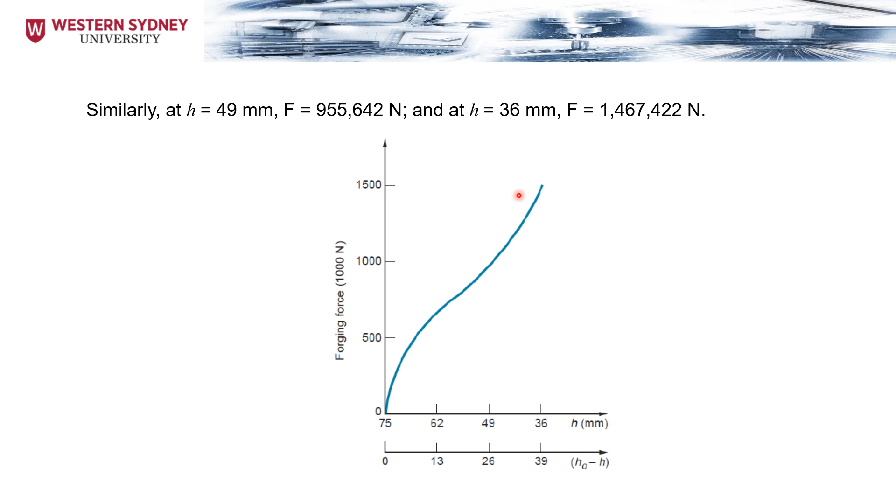Other operations classified as open die forging or related operations include fullering, which is a roughing forging process to reduce the cross section for further forging later. We have edging, which uses concave dies instead of flat ones. And we have cogging, which is an incremental forging process where we take it step by step until we reach the final thickness.

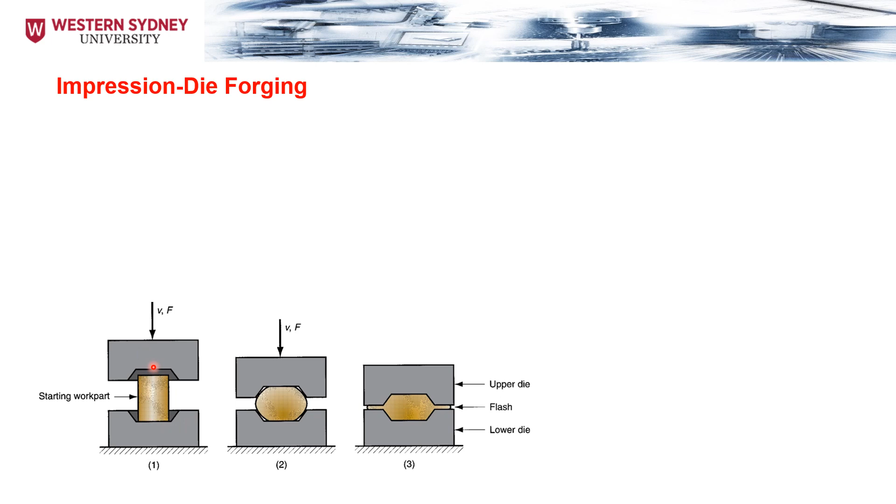Now in the case of impression die forging, we said we're going to have a cavity inside the die. The compression of the work part by the dies will be the inverse of the desired part shape. The flash is going to be formed by the metal that flows beyond the die cavity into a small gap between the die plates.

The flash must later be trimmed, but it serves an important function during compression. First, as the flash forms, friction resists continued metal flow into the gap, and this constrains the metal to fill the die cavity. In hot forging, metal flow is further restricted by cooling against the die plates.

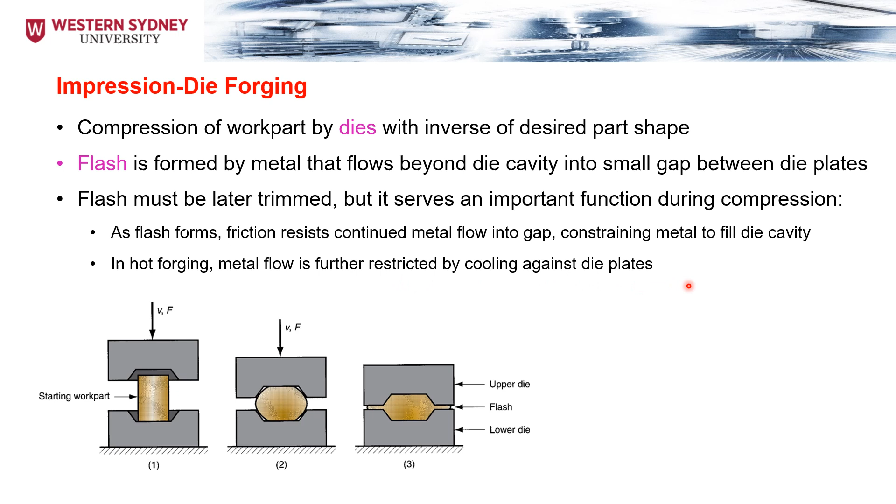So basically that's what happens in the operation. You can see the flash is generated, and this relieves the pressure inside the die cavity, so we need less force to be used. The force increases, reaches the maximum stress, and then drops down because the flash has been generated.

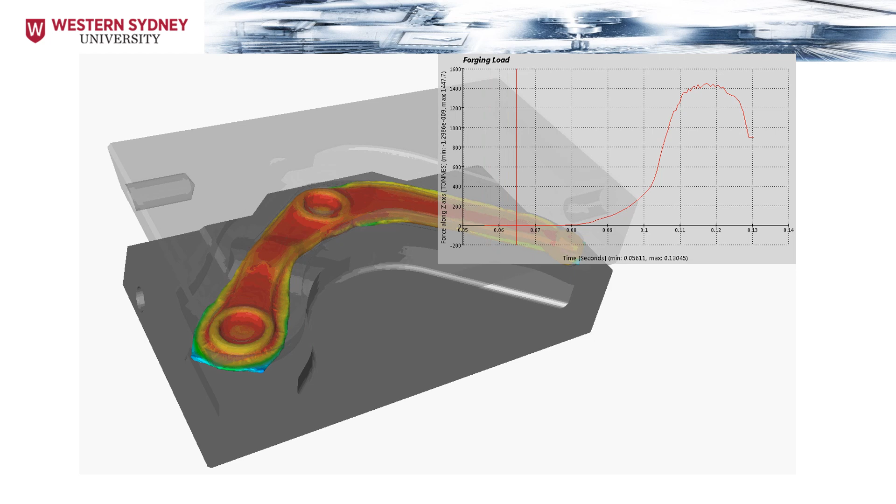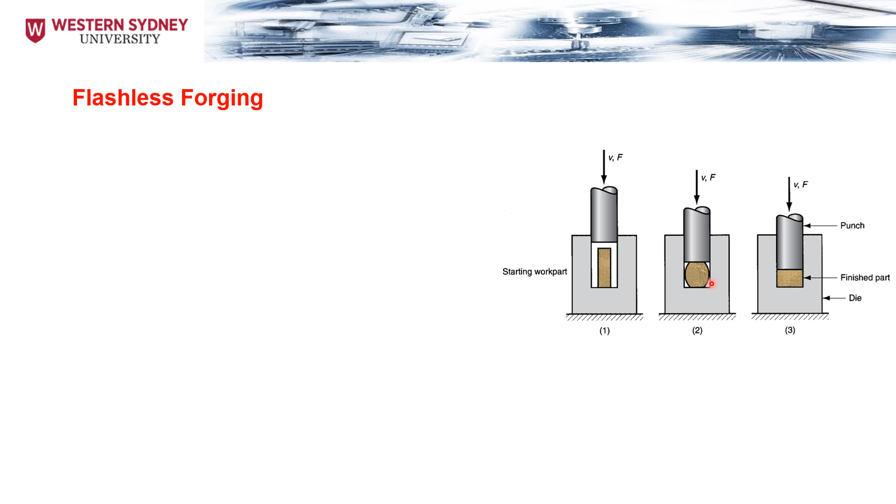Now the final type is flashless forging. We put the work part inside the die cavity, which is totally enclosed, so no flash is generated. We apply forces, and this causes the part to take the final shape of the die cavity. What's happening is the compression of the work in the punch and die tooling, whose cavity does not allow for flash.

The starting work volume must be equal to the die cavity's volume within very close tolerances. So the volume of the original part should equal the volume of the final part or the die cavity we end up with. The process control is more demanding than impression die forging. The best suited part geometries are simple and symmetrical, otherwise you won't be able to remove it from the die cavity.

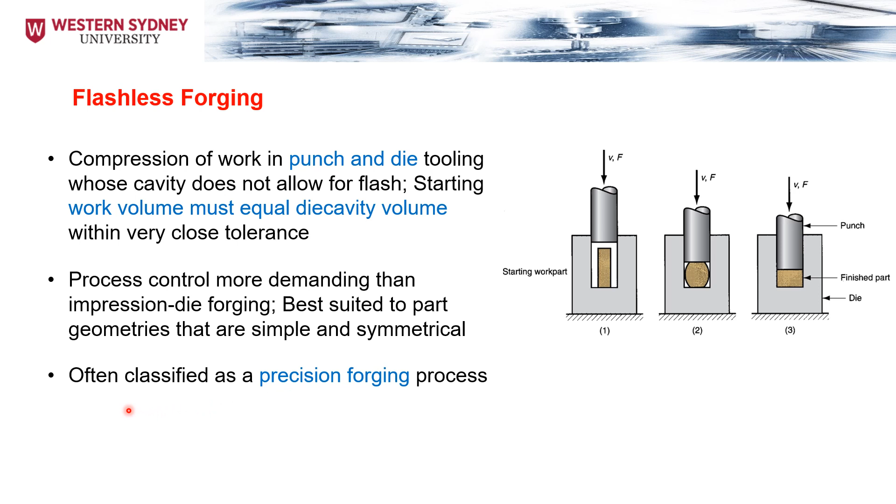Often it's classified as a precision forging process because the final shape is exactly the shape of the part we would like to have.

Now for impact or drop forging: this applies an impact load against the work part, and there are two types. First, gravity drop hammers, where impact energy comes from the falling weight of a heavy ram. Or we have power drop hammers, where the ram is accelerated by pressurized air or steam.

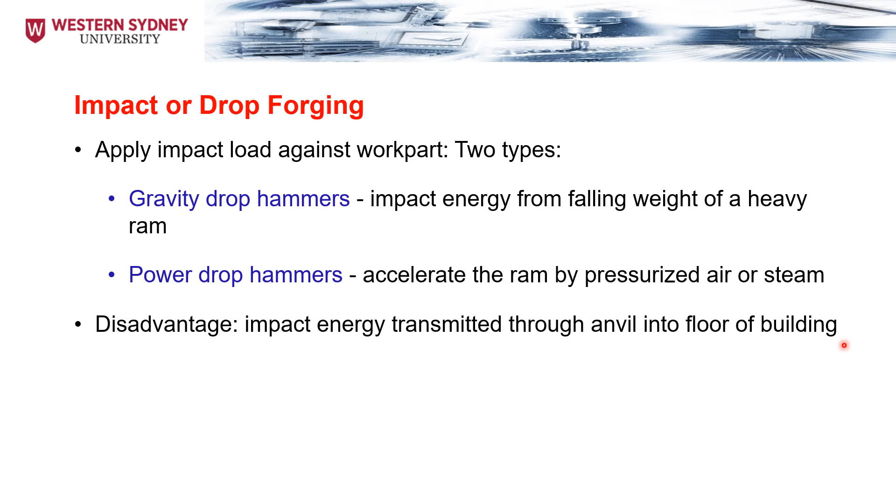A disadvantage of impact or drop forging is that the impact energy is transmitted through the anvil into the floor of the building, which of course can cause damage to the base of the building. It's commonly used for impression die forging.

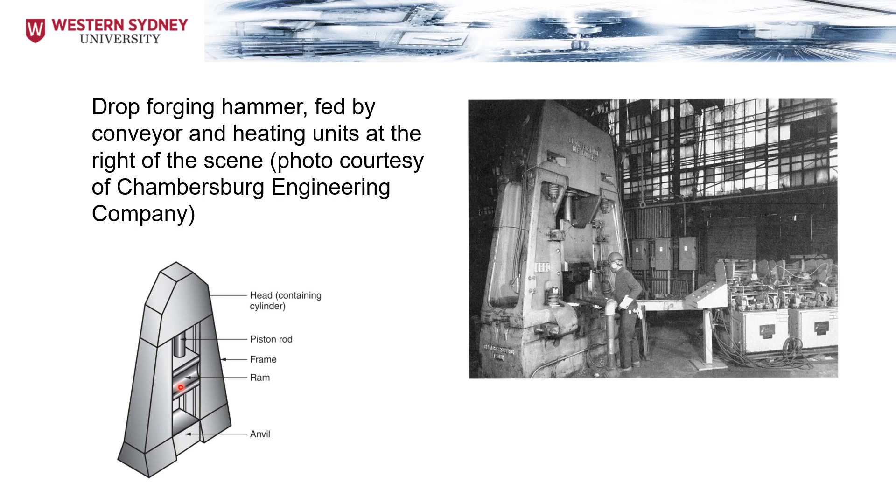This is an example of a drop forging hammer fed by a conveyor and heating units, at the right of the scene as you can see. The material starts being fed, the hammer is taken up, and then it's dropped down to the anvil. The part sits between the anvil and the ram, and the forging process is carried out.

Other forging processes include forging presses, which apply gradual pressure to accomplish the compression operations. The types are the mechanical press, which converts the rotation of the drive motor into linear motion of the ram; the hydraulic press, where a hydraulic piston actuates the ram; and the screw press, where a screw mechanism drives the ram.